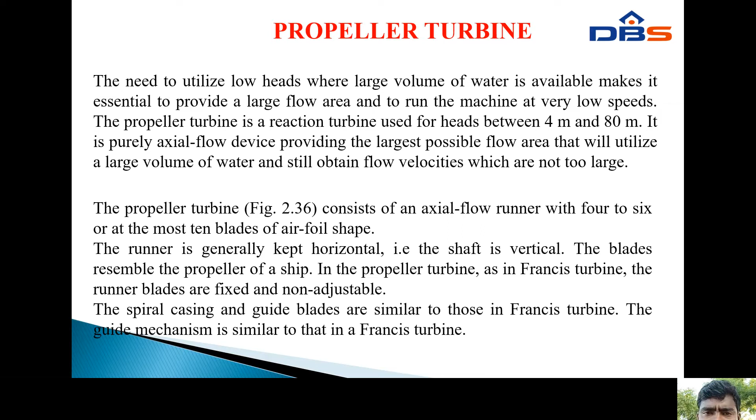The spiral casing and guide blades are similar to those of the Francis turbine, and the guide mechanism is also similar. Francis turbine, Kaplan turbine, and propeller turbine are all reaction turbines, while the Pelton wheel turbine is an impulse turbine. The guide mechanism and spiral casing are the same across these reaction turbines.

Propeller turbine means Kaplan turbine. This is the Kaplan turbine.

As shown in the figure: shaft, scroll casing, runner vane, guide vane, draft tube, tail race, and hub. These are the main parts of the Kaplan turbine.

As shown in the bottom figure, there are guide vanes, runner, and water inlet from the penstock, where water is taken in. The guide vanes and runner vanes are arranged in blades.

The guide vanes and runner vanes are small parts of the Kaplan turbine, similar to those in the Francis turbine. The hub is a separate part, which can be shown in a separate figure to understand the hub, shaft, and vanes. The vanes are horizontal while the shaft is the vertical connection. This is the complete Kaplan turbine figure.

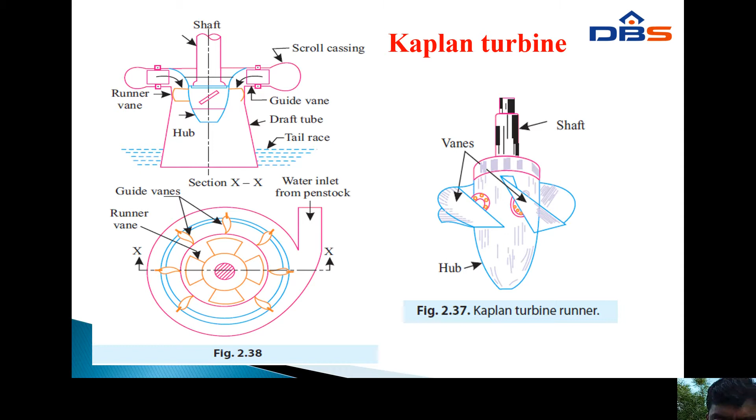This is a small problem on Kaplan turbines. A Kaplan turbine develops 22,000 kilowatts at an average head of 35 meters, assuming a speed ratio of 2.0, a flow ratio of 0.6, diameter of the boss equal to 0.35 times the diameter of the runner, and an overall efficiency of 88%. Calculate the diameter, speed, and specific speed of the turbine.

This is a Kaplan turbine small problem. First, write down the given data: shaft power P equal to 22,000 kilowatts, head H equal to 35 meters, speed ratio Ku equal to 2.0, flow ratio Kf equal to 0.6. The speed ratio symbol is Ku and the flow ratio symbol is Kf.

Next, diameter of the boss dB equal to 0.35 into diameter of the runner d naught, so dB equal to 0.35 d naught. This condition is given in the problem. Next, the overall efficiency equal to 88%.

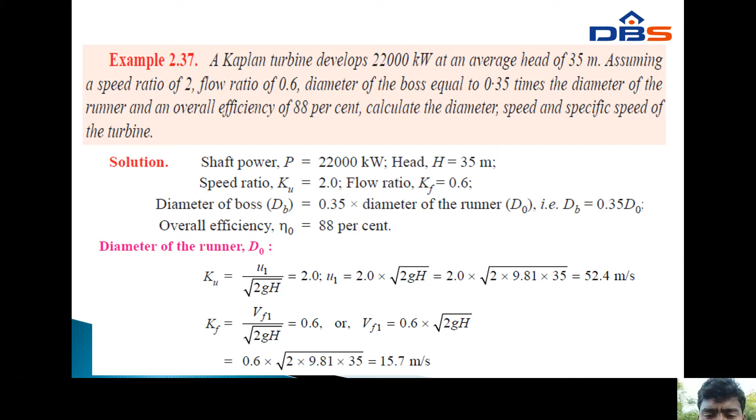Next, overall efficiency means shaft power by water power. This is a hub, runner, and boss, with dB and d naught given in the problem, where dB equal to 0.35 d naught. Overall efficiency equal to shaft power by water power.

Shaft power is given in the problem as 22,000. Water power means WQH. The overall efficiency is given as 0.88 equal to 22,000 divided by 9.81 into Q into 35. Therefore, Q equal to 22,000 divided by (0.88 into 9.81 into 35), which equals 72.8 meter cube per second.

Therefore, Q equal to area of flow into velocity of flow.

Area of flow into velocity of flow. Okay, that equal to pi by 4 into d naught square minus dB square into Vf1. Okay, d naught square minus dB square into Vf1. Okay, Q equal to

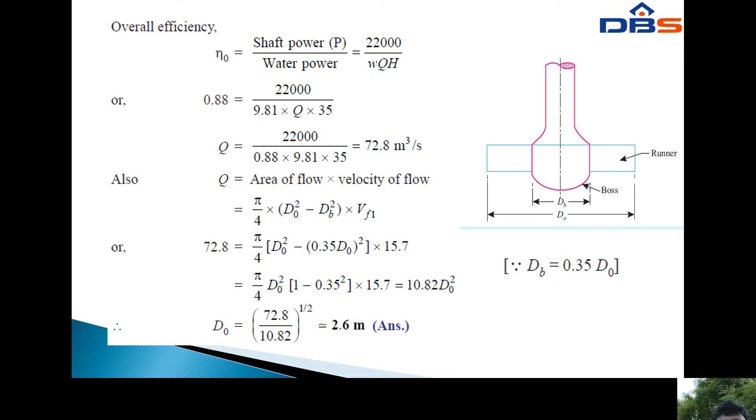72.8, that equal to pi by 4 d naught square minus dB, 0.35 dB d naught whole square into 15.7. Okay, that equal to pi by 4 d naught square into 1 minus 0.35 square into 15.7, that equal to, in terms of d naught, 10.82 d naught square. Therefore, d naught equal to 72.8 divided by 10.82 whole to the power of 1 by 2, that equal to 2.6 meters. D naught value is 2.6 meters.

Next, speed of the turbine N. U1 equal to pi dn by 60. U1 equal to pi dn by 60. Therefore, N equal to 60 U1 by pi d naught. That equal to 60 into 52.4 divided by pi into 2.6. That equal to 384.9 RPM.

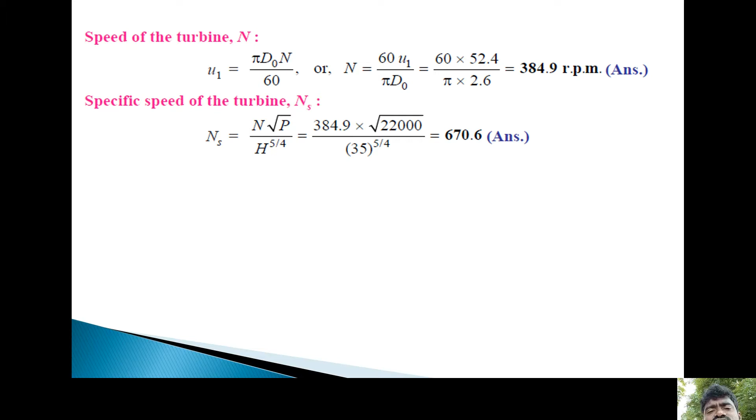Next, specific speed of the turbine, Ns. Ns equal to N into root P by H power of 5 by 4. That equal to, N is already calculated, that equal to 384.9 into P is the power available in the problem, 22,000, divided by H 35 whole to the power of 5 by 4. In this equation to calculate the Ns, that equal to 670.6.

Okay, next, this is another problem in this unit 2. Fluid mechanics and hydraulic machines subject, in this unit 2, small definitions and mostly important problems. In external examinations, mostly important problems are asked.

The propeller reaction turbine, the runner diameter 4.5 meters, is running at 48 rpm. The guide blade angle at inlet is 145 degrees and the runner blade angle at outlet is 25 degrees to the direction of vane. Okay, the axial flow area of water through the runner is 30 meter square. If the runner blade angle at inlet is radial, determine hydraulic efficiency of the turbine, discharge through the turbine, power developed by the runner.

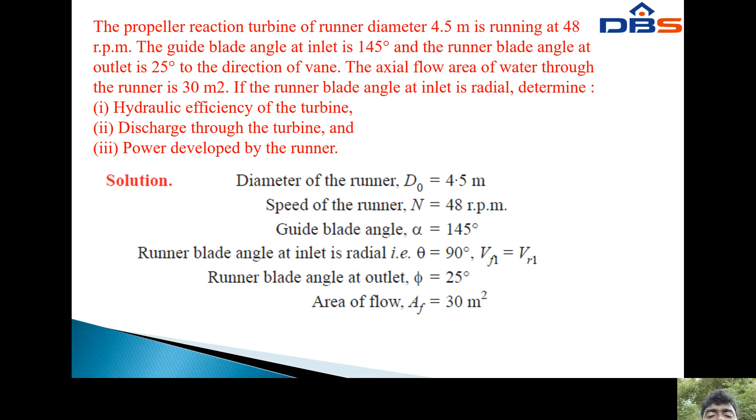This is the figure as shown, and this is the velocity figure, for hydraulic efficiency of the turbine. Now this is the velocity figure of the Kaplan turbine. This portion is the inlet velocity triangle. In this inlet velocity triangle, Vf1 equal to Vr1, and theta equal to 90 degrees because Vf1 equal to Vr1.

Therefore Vf1 equal to Vf2, because the area of flow is constant, the water velocity is constant. Next, the tangential speed of the turbine at inlet, U1 equal to pi dn by 60. Inlet means U1 equal to pi dn by 60, pi into d naught, n equal to already given in the problem, divided by 60, that equal to 11.31 meter per second velocity. Also, U1 equal to U2, that equal to 11.31 meter per second.

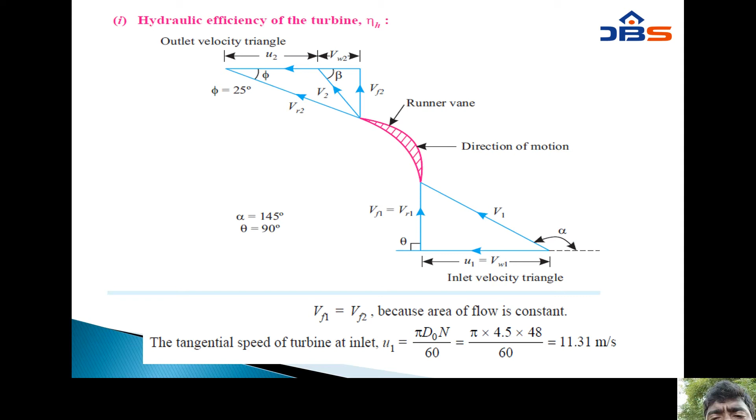Tan theta means 180 minus alpha equals theta. In this inlet diagram, tan(180 minus alpha) equals Vf1 by U1. Therefore, from that equation you can calculate Vf1. Vf1 equals U1 into tan 35, that equals 11.31 meter per second... 7.92 meter per second. Vf1 equals U1 into tan 35, that equals the Vf1 value. Next, therefore Vw1 equals U1, that equals 11.31 meter per second.

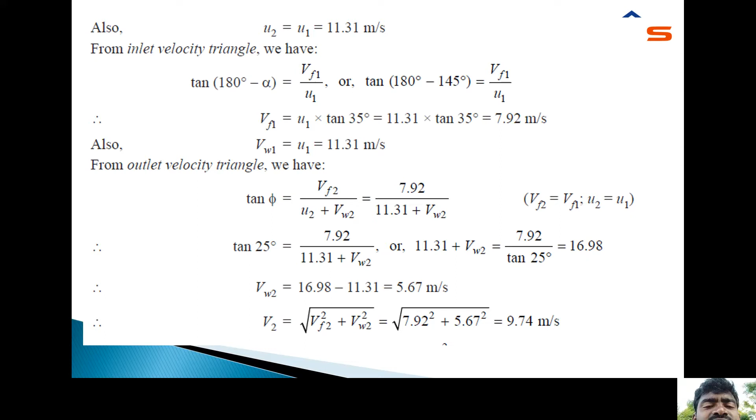From the outlet triangle, tan phi equals Vf2 by (U2 plus Vw2), where Vf2 equals Vf1, and U2 equals U1. Using tan phi equals Vf2 by (U2 plus Vw2) to calculate Vw2: tan 25 equals 7.92 divided by (11.31 plus Vw2). Therefore Vw2 equals 16.98 minus 11.31, that equals 5.67 meter per second. Next, V2 equals root of (Vf2 square plus Vw2 square), that equals 9.74 meter per second.

Next, H equals 1 by G times (Vw1 U1 minus Vw2 U2) plus V2 square by 2G. The negative sign is taken since the absolute velocities at inlet and outlet are in the same direction, and are velocities of whirl. H equals 1 by G, means 9.8 into 11.31 into 11.31 minus 5.67 into 11.31, plus 9.74 whole square by 2 into 9.81, that equals 6.5 plus 4.83, that equals 11.33 meters. H equals head.

Next, hydraulic efficiency equals (Vw1 U1 minus Vw2 U2) divided by GH. Vw1 11.31 into 11.31 minus 5.67 into 11.31, divided by 9.81 into 11.33, that equals 0.575, or 57.5%. This is the hydraulic efficiency of the turbine.

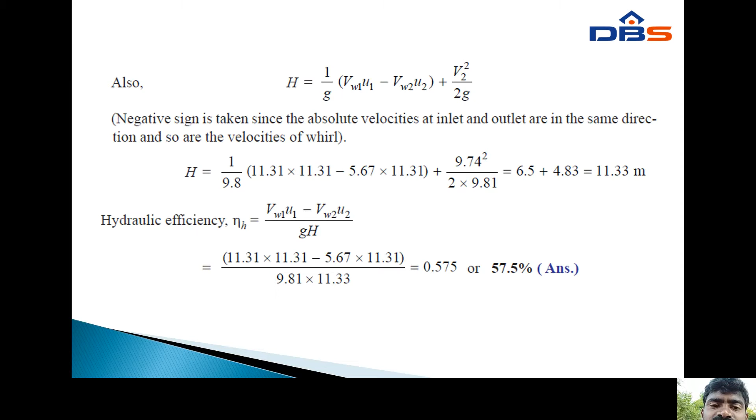Next, discharge through the turbine. Q equals area of flow into velocity of flow. Area of flow means AF, velocity of flow means Vf1. Area of flow equals 30 and velocity of flow Vf1 equals 7.92. That value is calculated to 237.6 cubic meter per second. This is the discharge value.

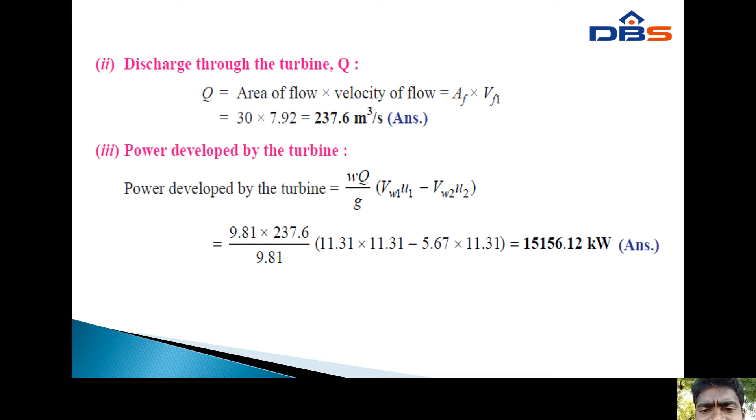Next, power. Power developed by the turbine equals WQ by G into (Vw1 U1 minus Vw2 U2). This is the formula for the power developed. W equals weight of the water, 9.81 into 237.6 by 9.81 G. The values of Vw1 U1 and Vw2 U2 are substituted in this equation to calculate the power developed by the runner, that equals 15156.12 kilowatts. This is the problem.

Next topic is draft tube. In reaction turbines, a draft tube is used in one part. In case of mixed and axial flow turbines, only a part of the available energy is converted into velocity energy at the inlet of the runner. The rest is in the form of pressure energy.

This residual pressure is converted into velocity in the runner, as a consequence of which the outlet velocity increases. With the increase in the value of specific speed ns, the exit velocity energy V2 square by 2g increases compared with H, the available energy. In the Pelton wheel, all the available energy is converted into velocity energy before it strikes the wheel.

As such it works, under atmospheric conditions, the wheel has to be placed above the maximum tail water level. The loss of energy due to exit velocity varies from 1 to 4 percent. That means some available energy losses occur in the turbines, and these losses are 1 to 4%.

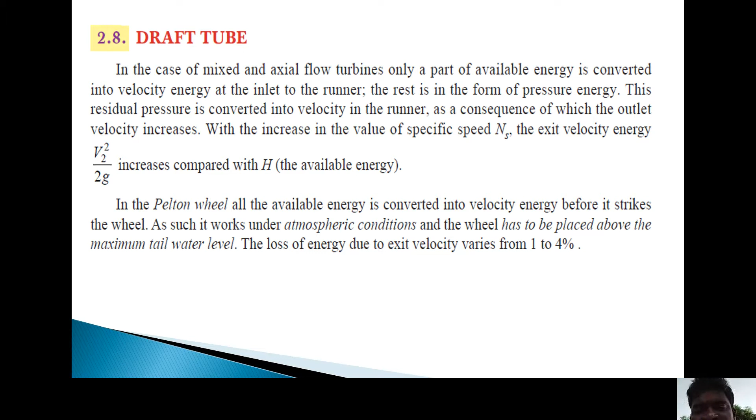Next, draft tube theory. This is the most important theory. Consider a turbine fitted with a draft tube. A draft tube means a conical part. Let y equal the distance from the bottom of the draft tube to the tail race. PA equals atmospheric pressure at the surface of the tail race. PA means atmospheric pressure.

Next, applying Bernoulli's equation to section 3-3 and section 2-2, in this draft tube, which has a conical shape, and the turbine casing. Next, part 2 and part 3.

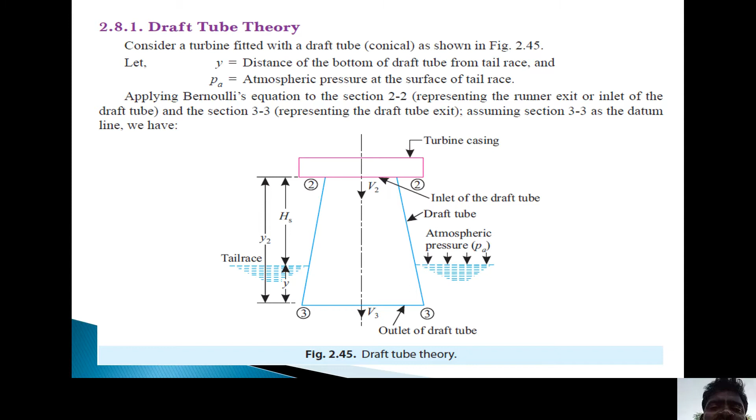This is divided into part 2 and part 3 by applying Bernoulli's equation. Part 2 and part 3 are equated: P2/W plus V2 square by 2G plus Y2 equal to P3/W plus V3 square by 2G plus 0 plus HF. HF means head losses due to friction between part 2 and part 3.

0 Y3 means there is no datum head, since from tail race to draft tube end point there is no height. Y2 is the height of the draft tube from the bottom to the second portion.

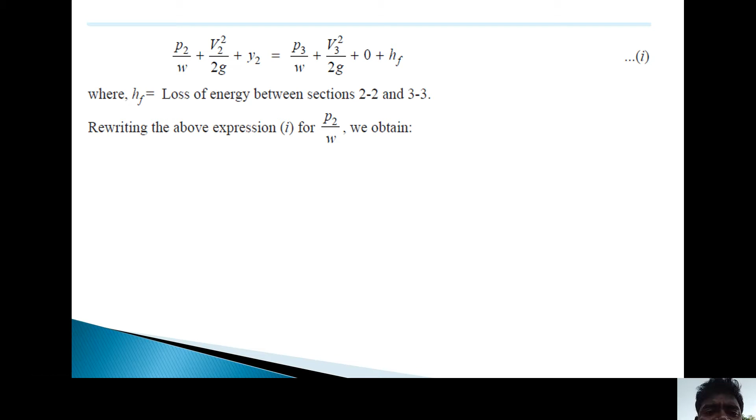P2/W equal to P3/W minus Y2 minus V2 square minus V3 square by 2G minus HF. Substituting P3/W equal to PA/W plus Y, where PA means atmospheric pressure, the equation becomes P2/W equal to PA/W plus Y minus Y2 minus V2 square minus V3 square by 2G minus HF.

The term Y2 minus Y, which represents the vertical distance from the runner to the tail water level, is called the suction head of the draft tube. Suction head of the draft tube means Y2 minus Y, and it is denoted by HS.

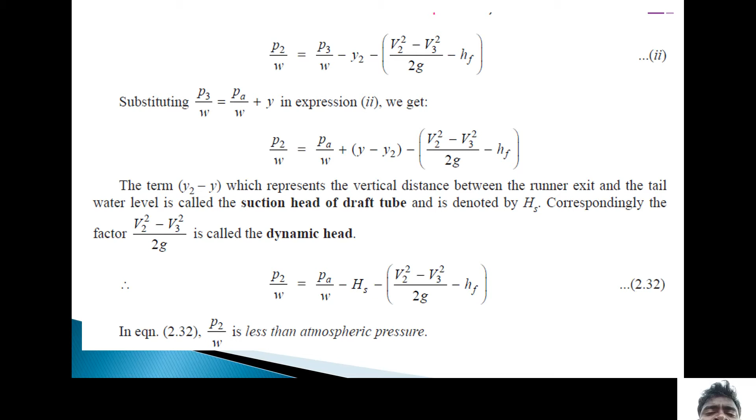The factor V2 square minus V3 square by 2G is called the dynamic head, that is, the velocity head. Therefore the equation is P2/W equal to PA/W minus HS minus V2 square minus V3 square by 2G minus HF. In this equation, P2/W is less than atmospheric pressure.

The efficiency of a draft tube is defined as the ratio of net gain in pressure head to the velocity head at entrance of the draft tube. Therefore, efficiency of the draft tube equals net gain in pressure head divided by velocity head at entrance of the draft tube.

Net gain in pressure head means V2 square minus V3 square by 2G minus HF, divided by V2 square by 2G, the velocity head at entrance of the draft tube. V2 equals velocity of water at section 2, inlet of the draft tube. V3 equals velocity of water at section 3, outlet of the draft tube.

Therefore HF equals V2 square minus V3 square by 2G minus efficiency of draft tube into V2 square by 2G. This is the equation of HF and the efficiency equation of the draft tube.

Efficiency means V2 square minus V3 square by 2G minus HF, by V2 square by 2G. So HF equals V2 square minus V3 square by 2G minus efficiency of draft tube into V2 square by 2G. This equation is written as HF.

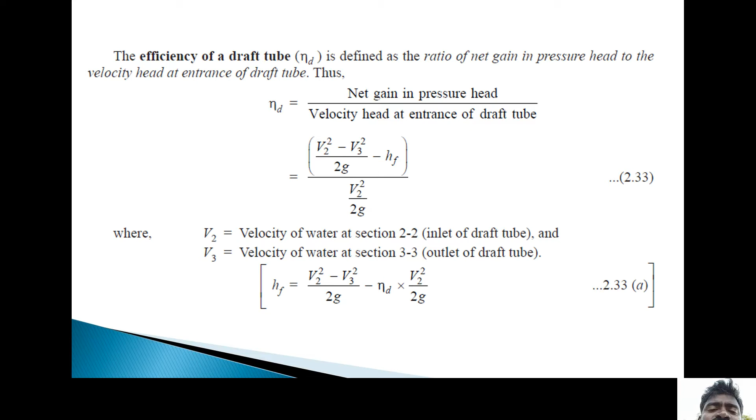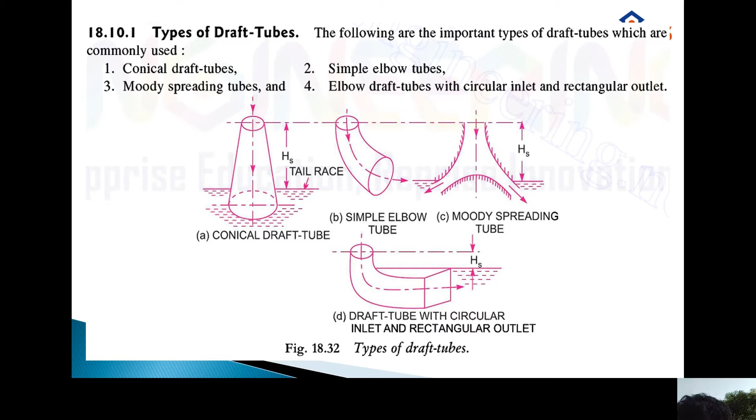Next, specific speed, this is an important small definition. Specific speed of a turbine is defined as the speed of a turbine which is identical in shape, geometrical dimensions, blade angles, gate opening, etc., which would develop unit power when working under a unit head.

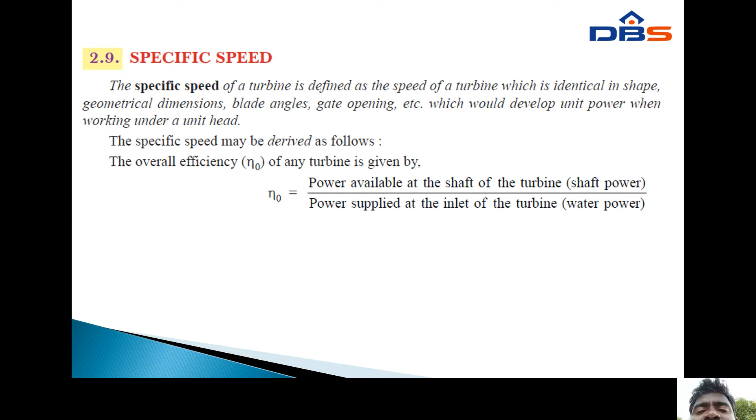The specific speed may be derived as follows: the overall efficiency of any turbine is given by power available at the shaft of the turbine, that is shaft power, by water power supplied at the inlet of the turbine. Therefore, efficiency equals shaft power P divided by water power WQH.

In this equation, P equals shaft power, Q equals discharge through the turbine, H equals head under which the turbine is working, W equals weight density of water. Efficiency equals P by WQH, so P equals efficiency into WQH, equation number 1. P is proportional to Q, and P is proportional to Q into H. The efficiency and W are constants.

D is the diameter of the actual turbine. N is the speed of the actual turbine. U is the tangential velocity of the turbine. Ns is the specific speed of the turbine. V is the absolute velocity of water.

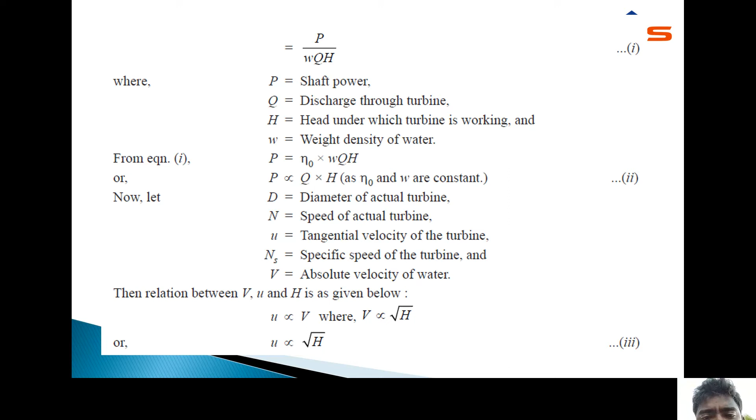The relationship between V, U, and H is given below: U proportional to root H. The velocity U equal to pi dn by 60. Therefore, root H proportional to dn, so D equal to root H by n.

Q equal to area into velocity. Area is proportional to B into D, where B means width, therefore D square. So Q proportional to D square into root H, that is root H by n whole square into root H.

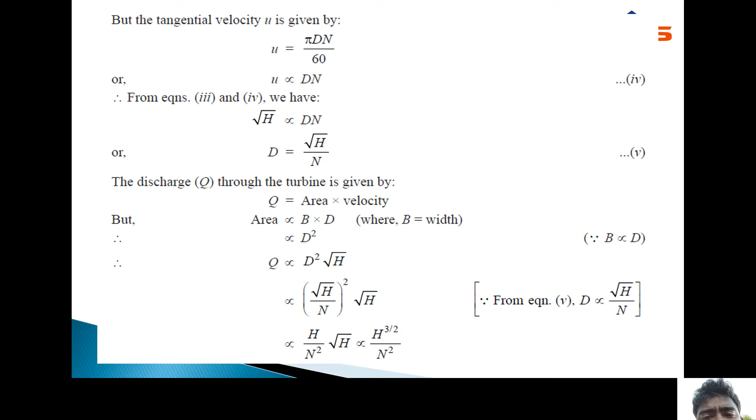This equation is written as P proportional to H power 3 by 2 by n square into H, proportional to H power of 5 by 2 by n square. Therefore P equal to K into H power of 5 by 2 by n square, where K is the constant of proportionality.

Where P equal to 1 kilowatt, H equal to 1 meter, speed equal to ns. Substituting these values in the above equation, 1 equal to K into 1 power of 5 by 2 by ns square. Therefore K equal to ns square.

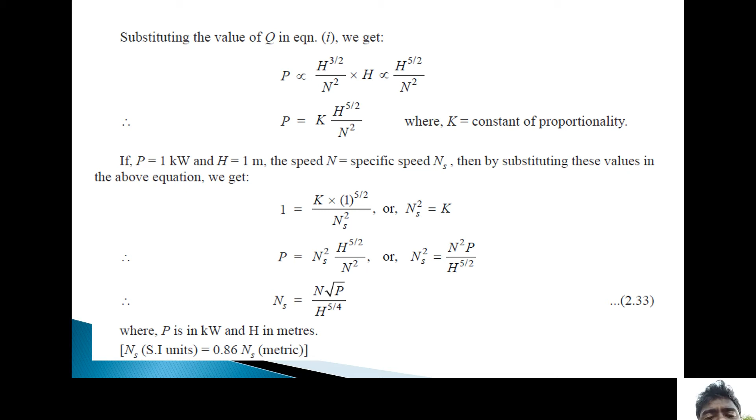The K value is substituted in P equal to K into H power of 5 by 2 divided by n square. Therefore the equation is written as ns equal to n into root P by H power of 5 by 4, where P is in kilowatts and H is in meters.

Small problems on the turbine: a turbine operates under a head of 25 meters at 200 rpm. The discharge is 9 meter cube per second. If the overall efficiency equal to 90% of the turbine, determine the power generated, specific speed of the turbine, and type of turbine.

H equal to 25 meters, speed equal to 200 rpm, discharge equal to Q, overall efficiency equal to 90%. The power generated P equal to efficiency into W Q H, where efficiency means 0.9, W means 9.81, Q equal to 9, and H equal to 25.

That value is 1986.5 kilowatts of power. Specific speed Ns is equal to N root P by H power of 5 by 4. This is the turbine specific speed formula.

N value is already given in the problem and P value is already calculated. H value is already given in the problem. All values are substituted in this equation to calculate NS equal to 159.4 rpm.

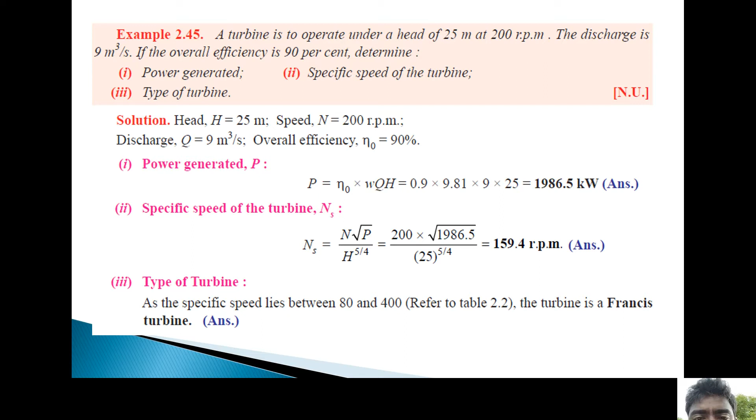Type of turbine: the specific speed is between 80 to 400. Since the specific speed is between 80 to 400, the turbine is a Francis turbine.

Next, main characteristics curves. These are the characteristics curves where head and gate opening are maintained constant.

The speed is varied by allowing a variable quantity of water to flow through the inlet opening. The brake power P is measured mechanically by means of a dynamometer. The overall efficiency and unit quantities are calculated using this basic data, which is plotted as unit speed versus various parameters.

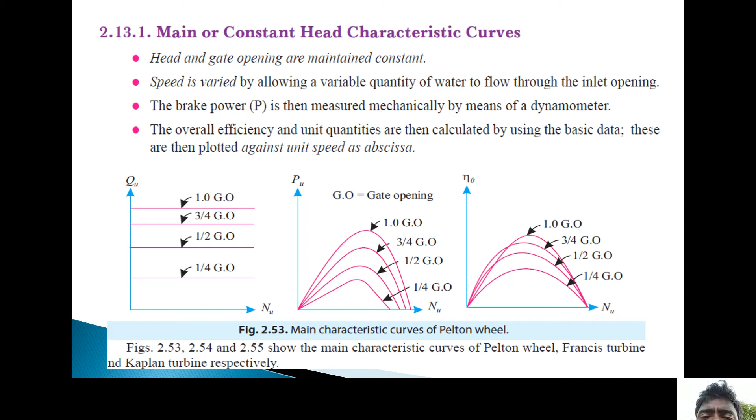Next, the power versus speed figure, with gate opening values like 1/4, 1/2, and so on. This is one characteristic curve, drawn from the origin point up to some maximum value, then reducing. Similarly, the efficiency versus speed curve follows the same pattern.

Next, the main characteristics curves of a Francis turbine.

These are the Pelton wheel turbine.

Next, these are the main characteristic curves of a Francis turbine. The main characteristic curves follow this information: first figure is discharge versus speed, next is power versus speed, next is efficiency versus speed.

First figure is the discharge versus speed figure. The discharge values are shown at gate openings of 1/4, 1/2, 3/4, and 1.0. These figures are already explained in the civil department unit number 5, pumps, where centrifugal pump characteristic curves are available. In this turbine also, characteristic curves are available.

In these turbines: Pelton wheel, Francis, Kaplan. Kaplan turbine is not mentioned in your syllabus, civil department. In civil department only Pelton wheel and Francis turbines are available in your syllabus. Next, draft tubes are also available.

In the main characteristic curves, the discharge versus speed for a Pelton wheel depends upon the gate opening and different speeds, and the curves are horizontal lines. The curves between discharge and speed for the Francis turbine are falling curves.

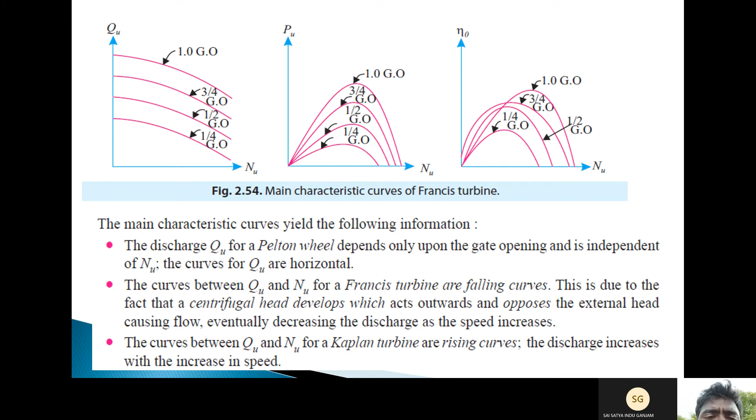Both three turbine curves: first Pelton wheel, Francis, Kaplan. Pelton wheel turbines' main characteristic curves are horizontal lines. Next, Francis turbine curves are falling curves. Next, Kaplan turbine curves are rising curves.

Three important points: these curves are for the Kaplan turbine. The curves between power versus speed and between efficiency and speed indicate that at a particular speed, the efficiency is maximum, as shown in the power versus speed curve and efficiency versus speed curve.

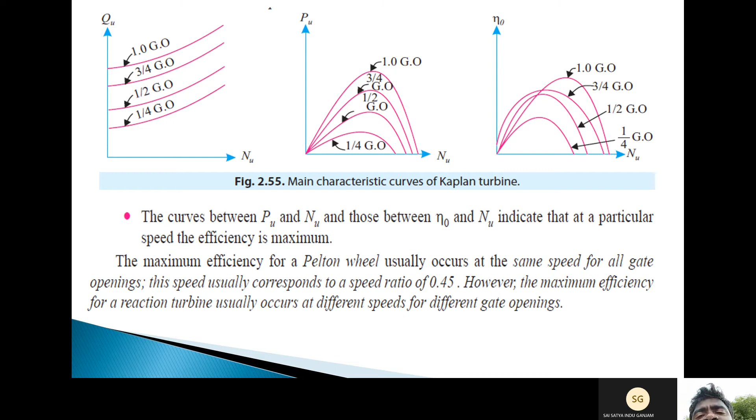In the second and third figures, the efficiency sometimes rises to a maximum value and then falls. First it rises, reaches a maximum value, then falls, in both the power versus speed curve and the efficiency versus speed curve.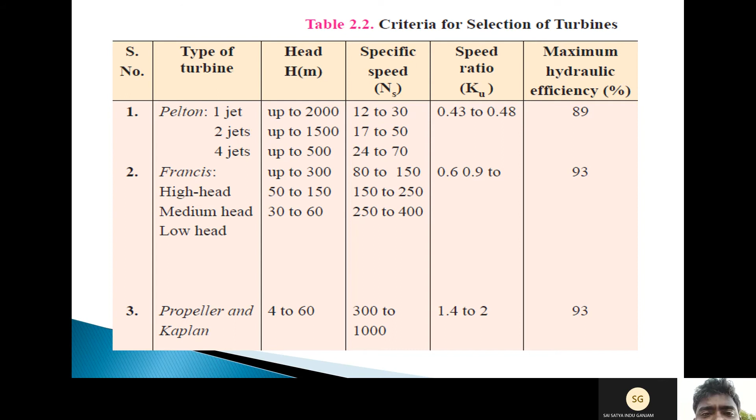Next, surge tank. It is a small component, a small reservoir or tank in which the water level rises or falls to reduce the pressure swing, so that pressure changes are not transmitted in full to the closed circuit. In general, the surge tank is employed to reduce the distance between the free water surface and the turbine, thereby reducing the water hammer effect.

Water hammer effect means the rapid change in pressure above or below normal pressure, caused by sudden changes in the rate of flow through the pipe according to the demand of the prime mover. A prime mover is a machine which generates power by utilizing some form of energy. The surge tank allows water to enter the prime mover without sudden changes.

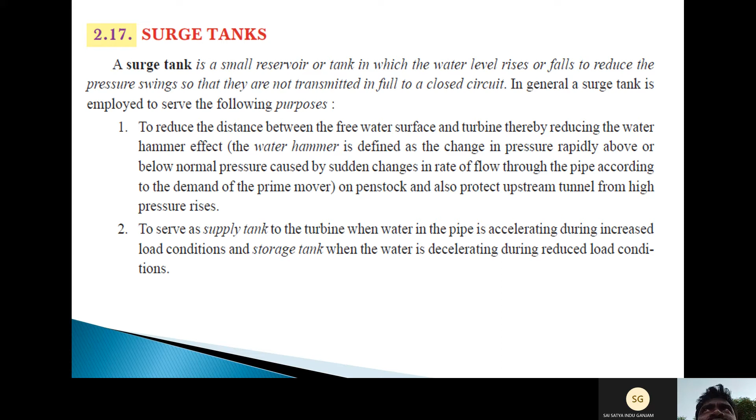Next, the types of surge tanks. This is the hydroelectric power station figure. First part is a dam, next part is the reservoir, meaning water levels. Next, penstock, surge tank, and power house. In the reservoir, water is stored.

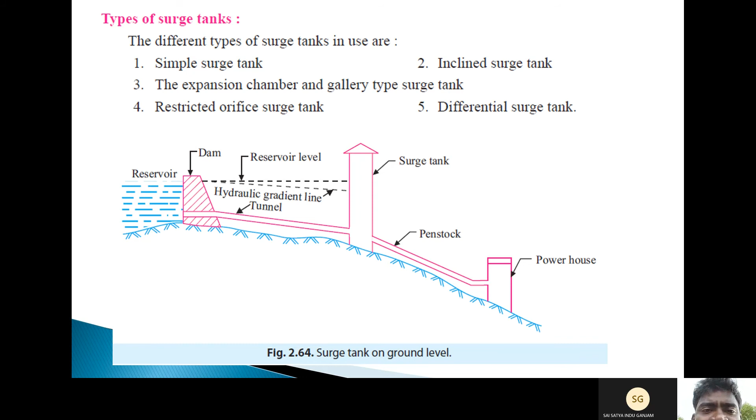Cavitation factor. This is the most important topic. In cavitation factor, sigma c.

Sigma c equal to ha minus hv minus hs by h. This equation is most important too, where ha is atmospheric pressure head in meters of water.

hv is vapor pressure in meters of water corresponding to the water temperature. h equal to working head of turbine, the difference between head race and tail race level in meters. HS is the suction head.

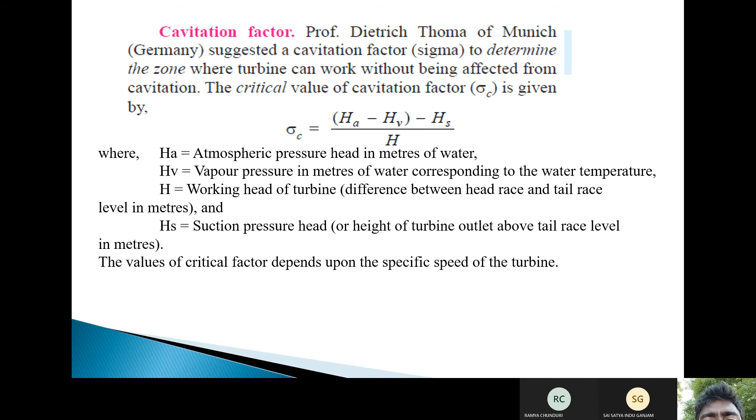The values of critical factor depend upon the specific speed of the turbine.

Unit quantities. Unit quantities are most important for only formulas. Unit quantity means root h by root h. This is the unit quantity.

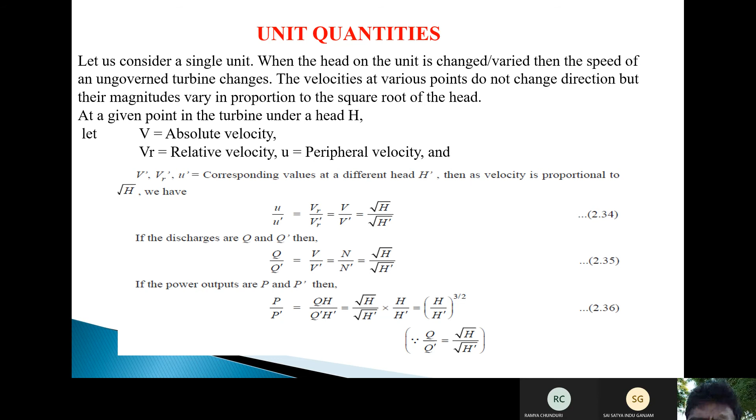These are the same, meaning total power divided by unit quantity of power. Total discharge per unit quantity of discharge. Total velocity per unit quantity of velocity per unit measured.

The hydraulic efficiency of a turbine under these two heads may be considered. The velocity triangles, these heads are similar. If the various quantities are reduced to a theoretical 1 meter head, comparison of performance data and computations of experimental values on the single unit are considered.

This is the unit speed, unit discharge, unit power equations. These equations are most important. These equations are unit quantities.

Unit speed means n by root h, based upon the head. Unit speed means n by root h.

Unit discharge means q by root h. Unit power means P by h to the power of 3 by 2. These three equations are most important.

The above quantities are called unit quantities: unit speed, unit discharge, unit power. These are the unit quantities.

Next, already I can explain the turbine. What is a turbine? Working of a turbine.